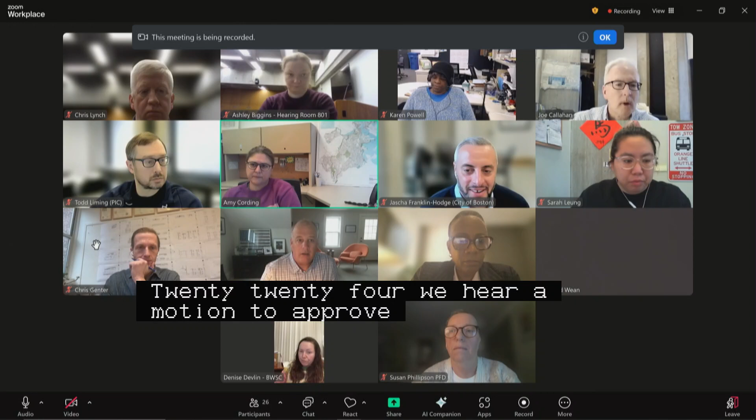Starting with new business number 1, 1520 Dorchester Avenue, Park Street, Dorchester. Specific repairs, vertical discontinuances on a set of petitions by the City of Boston Public Facilities Department. The proponents please introduce themselves, their affiliations, and give us a walkthrough of what you are proposing to do.

Good morning, Commissioners. My name is Susan Phillipson, and I'm the project manager with PFD, and I'll be managing the design and construction of the Fields Corner Library located at 1520 Dorchester Avenue, Dorchester, Mass. Please note at this time we are in process of finalizing the agreement, and I'd like to take this time to give you a quick project overview.

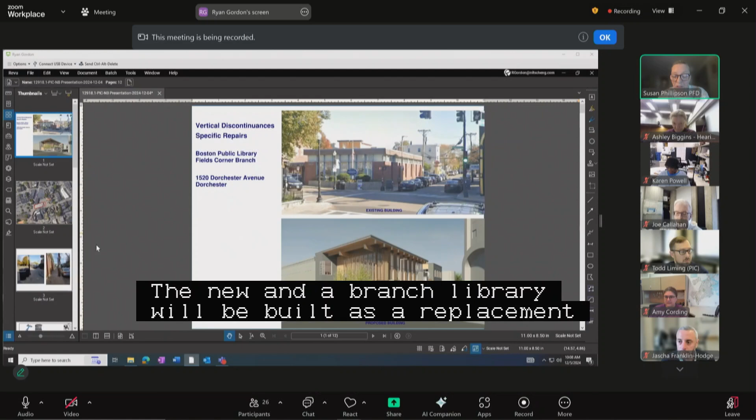The project will consist of replacing the existing single-story building, built in the 1960s era, currently 8,600 square feet, which will be demolished. The new Fields Corner Branch Library will be built as a replacement, programmed for approximately 14,700 gross square feet, and will be built as a two-story building.

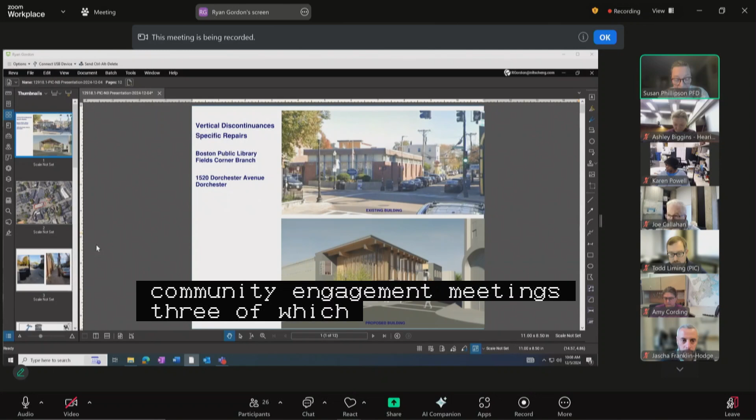The concept for the new library was conceived in collaboration with the Public Facilities Department, the Boston Public Library, and community input through a total of 6 public community engagement meetings, 3 held during the study phase and 3 during the design phase. At this time, I'd like to thank you for your time, and I'll now turn it over to Ryan Gordon of Nitsch to present the project's improvements.

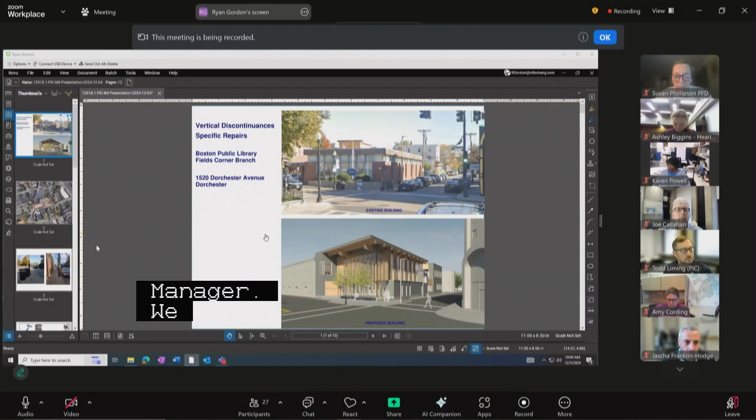Good morning. One second. Good morning to the commission. My name is Ryan Gordon, project manager with Nitsch Engineering. I was having some issues with my camera. I will present to you the vertical discontinuances and the specific repairs that we are seeking approval for.

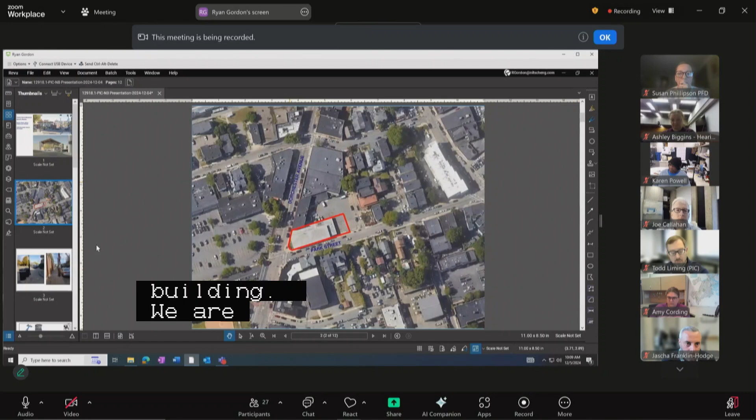Just to give you an overview, I have an image of the existing building here and a rendering of the proposed building. We are in the Dorchester neighborhood, Fields Corner. Dorchester Avenue runs north to south, and Park Street runs east to west. And here are some images of the existing public sidewalk.

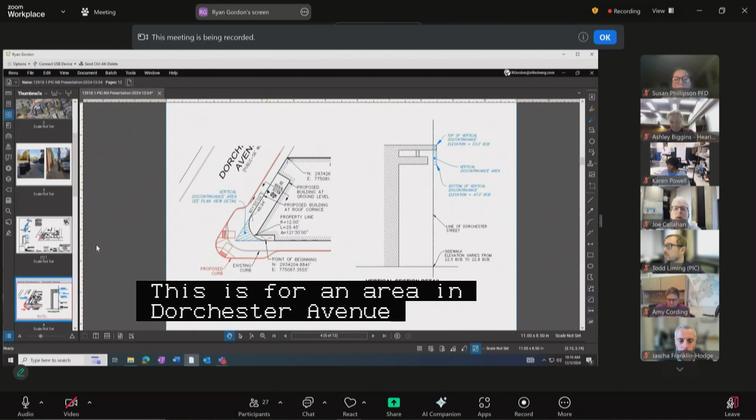First, I'll go into the vertical discontinuances, related to building overhangs and cornices. The first area is on Dorchester Avenue. I have side by side the area where we are seeking the vertical discontinuance, as well as a profile view. This is an area on Dorchester Avenue where the building will overhang for most of the street, extending just 2 inches over the property line. But as you round the corner, there are building elements that extend out over the property line, totaling an area of 116 square feet and a volume of 696 cubic feet.

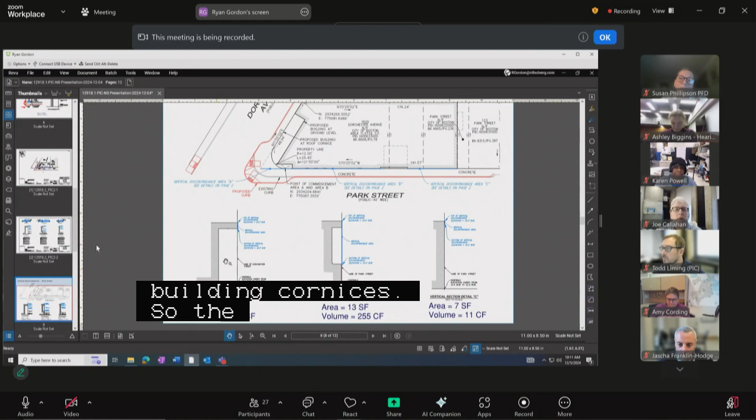Rounding to the other side of Park Street, there are 3 specific areas where we are seeking vertical discontinuance, each with plan view and section views, all related to building cornices. The first area is an extension of that overhang coming around from Dorchester Avenue, with a total area of 5 square feet and a volume of 20 cubic feet.

The second area continues along Park Street - 2 separate cornices at 2 different levels of the building for the 2 stories, with an area of 13 square feet and a volume of 255 cubic feet. A third separate area, area C, has an area of 7 square feet and a volume of 11 cubic feet.

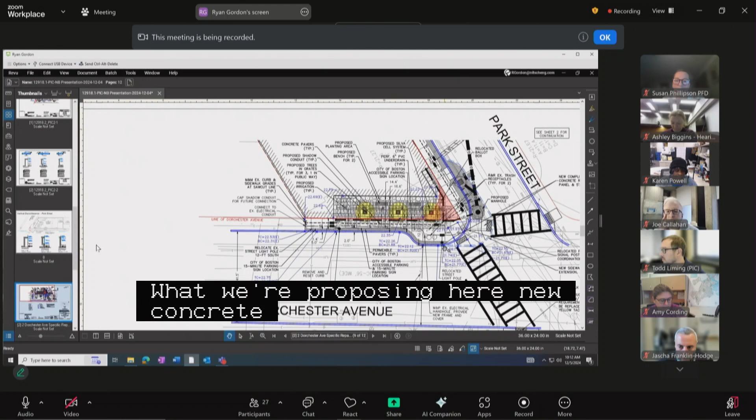Getting into the specific repairs, what we're proposing here: new concrete sidewalks with a permeable paver strip along the sidewalk on Dorchester Avenue. We are relocating a couple of existing City of Boston streetlights, providing new pole boxes and conduit.

We have 3 street trees. They'll actually be located under the building overhang, and only one of them extends into the public way, but we're including all of the information here as we have tree grates and silva cell systems under the sidewalk. We'll have irrigation and under-drains, and facilities is taking on responsibility for the maintenance of the trees.

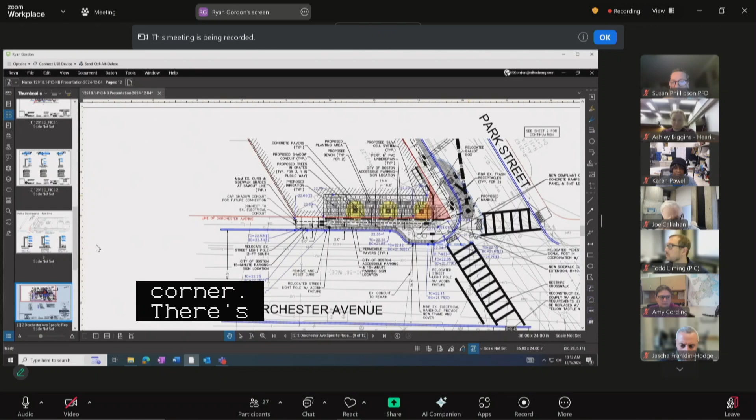We have a couple of parking signs that we're relocating, and we're also extending the bump-out at the corner. There's an existing bump-out there, and we're extending that out to narrow this intersection on Park Street and provide separate accessible pedestrian ramps. With that, we're replacing crosswalks.

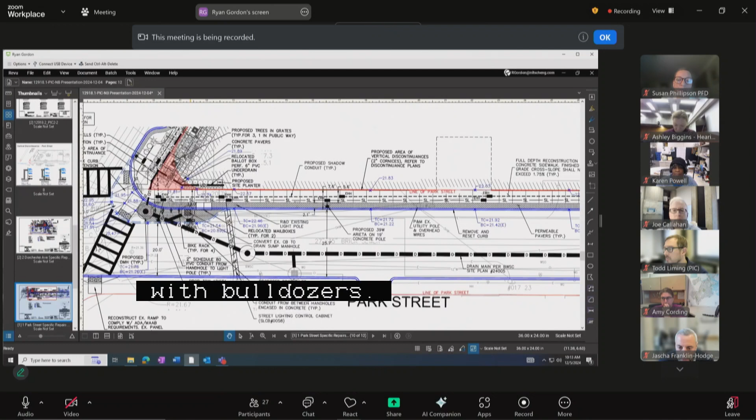We have new City of Boston streetlights with pole boxes. We'll have a parallel shadow conduit with pole boxes. We're removing and resetting the existing curb. We have a new catch basin drop inlet and a new drain main that has been approved by Boston Water and Sewer Commission.

And as we head down the street, we have an opening for the parking lot, and we worked with BTD and the Disabilities Commission to narrow the width of that opening for the driveway curb cut. And then we have a couple of sheets of our details. I didn't mention this, we have a couple of bike racks proposed in the new bump-out area.

So with that, I'll be happy to answer any questions that you have. Thank you very much. Commissioners, questions?

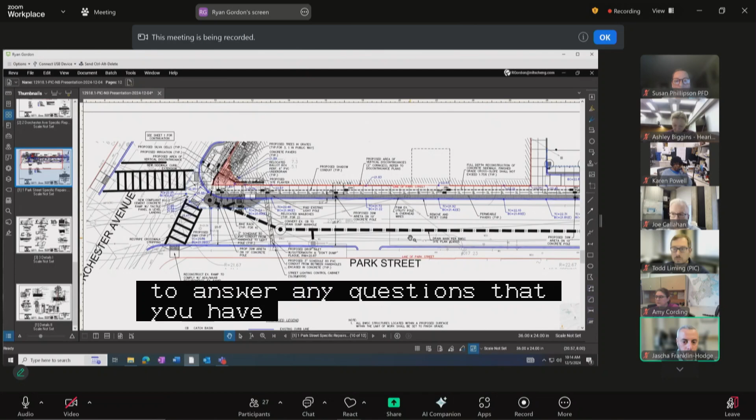All right, hearing none from other commissioners, I have 2 just quick questions. Apologies if you said this and I missed it, but what is the drainage situation related to the overhang? Is there a mechanism in place to ensure that it's not dripping water onto the sidewalk, or ice or whatnot?

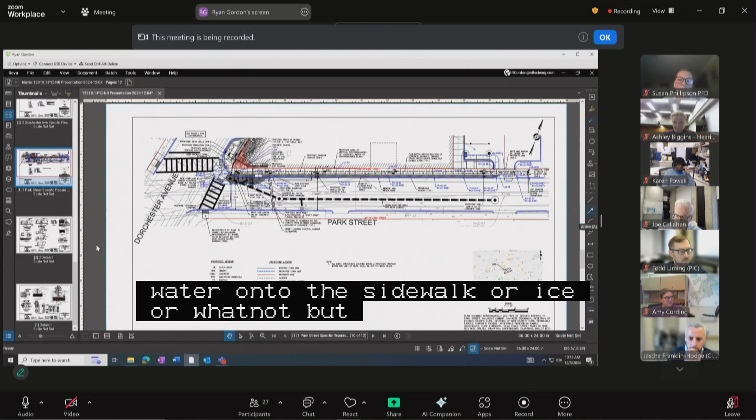The overhang — and Chris Genter from Edenzello, the architect, is also here, so please chime in if I'm missing anything, Chris — but it's essentially part of the building roof, so it'll drain. That's exactly right, Ryan. It's part of the building roof drainage system, so there's interior roof drains. It's sloping, draining away from the street. Nothing's dripping onto the street.

Got it, okay. And the second question was just, I was sort of intrigued to see trees being planted under the overhang. Can you say a little bit more about that? Interested in how you're doing that, how those are going to be maintained, all of that.

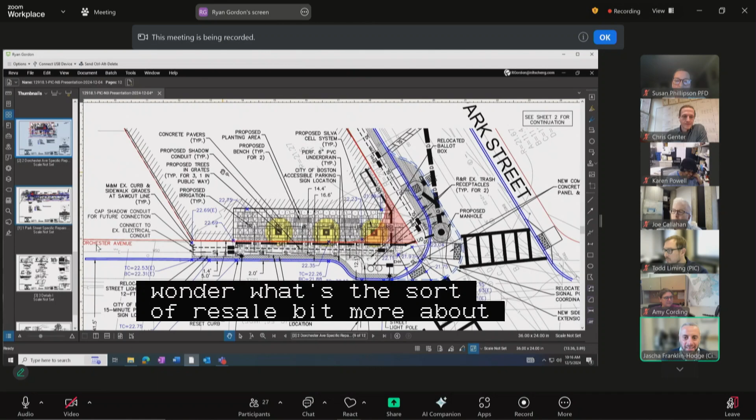Yeah, well, the overhang here is tall — let's see, we're, 47 feet, or sorry, 25 feet above the sidewalk here. So I know that the landscape architect has looked at this for the tree species that'll be successful here, and they're willing to take on any maintenance, should there be any issues with this under the overhang here.

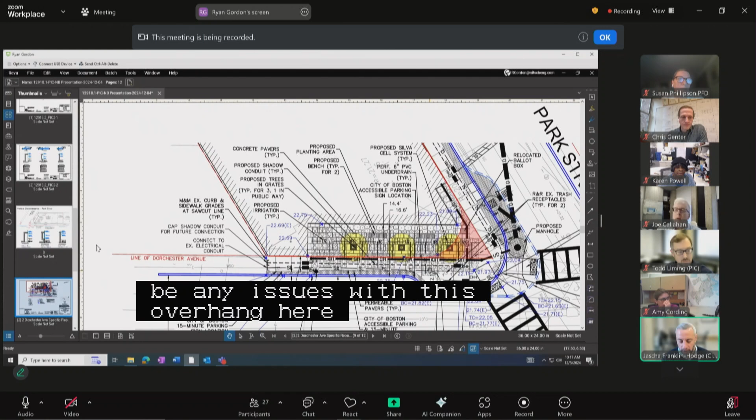And will the trees themselves be covered under the LMI, or are those anticipated to be maintained by Boston Parks as most other street trees are? The trees will be part of the LMI. Okay, got it, okay, excellent.

I have no other questions. PIC staff or members of the public? I will take this opportunity to remind everyone, if you wish to add testimony or ask questions, please use the raised hand function at the bottom of your screen. I don't see anybody lined up right now. I don't have any comments either, so I think we're all set on this for now.

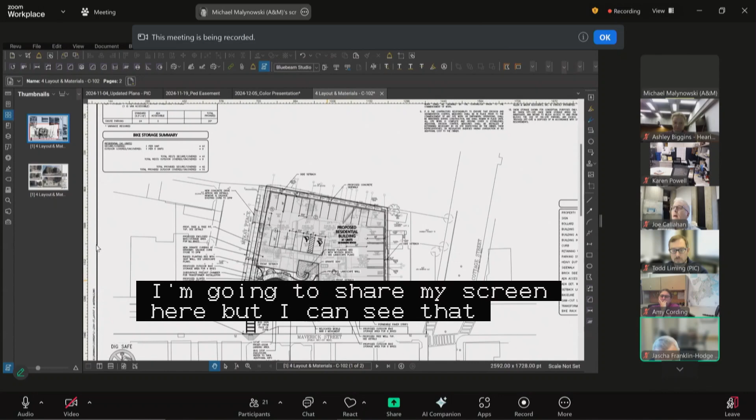Everybody can see that? Yep, we can see. All right, so our project is located on the corner of McKay Place and Maverick Street, just in front of the McKay School, which is right here. The existing project consists of 4 residential lots, consisting of several multi-family buildings. All of the buildings will be razed, and a new building will be constructed in its place, consisting of 41 units with 26 parking spaces.

As you can see, we've got garage parking on the first floor, which will access McKay, an amenity space, and then the upper levels will be residential dwellings.

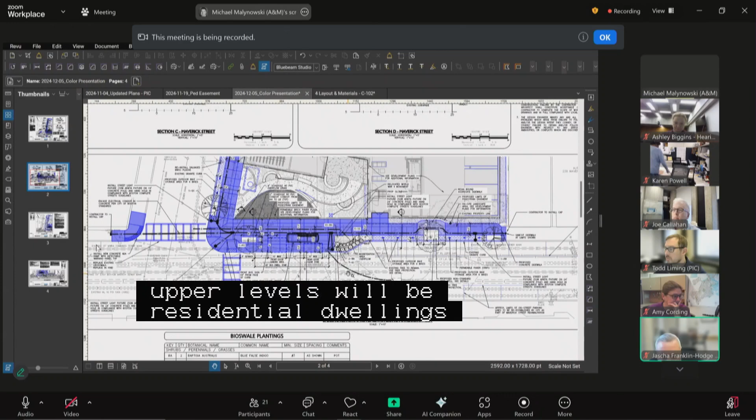Let's get into the public improvements. The proposed improvements for the project include some off-site features. We have a pocket park that we've gone through permitting with the BPDA, though that is not included in our LMI. That work will consist of new sidewalks along McKay Place and Maverick Street.

This includes new crosswalks and corresponding ADA ramps along Maverick here and here. We also have a bump out being proposed to accommodate a new bus shelter in this location. Our sidewalks will be a minimum of 6.5 feet, along with a permeable paver strip that is 3 feet, giving us a total of 9.5 feet as a minimum condition in the space.

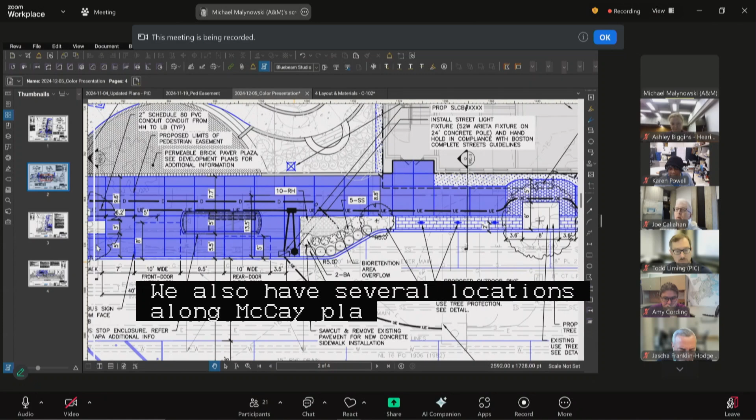We also have outdoor bike parking located here along Maverick Street, and several locations along McKay Place as well. As part of the discussions with Boston Street Lighting, we have light poles and conduits with pull boxes being installed along Maverick and on McKay.

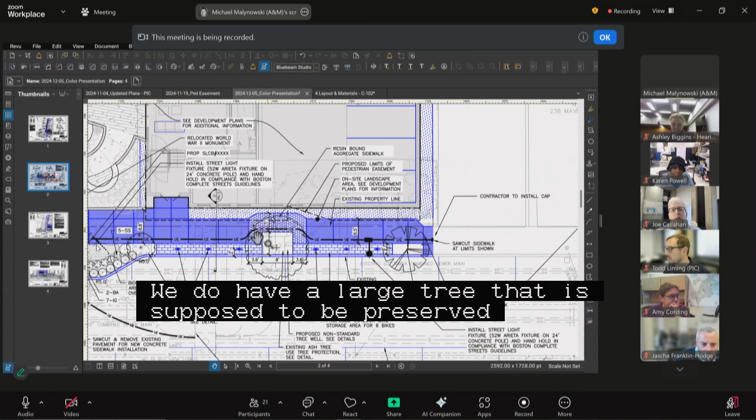There's an existing tree being preserved here, and the creation of a small bioretention rain garden area in this location. That area will have under drains and drain to existing infrastructure in McKay Place. We also have a large tree proposed to be preserved based on discussions with city staff. The sidewalk on the back side has been pushed out to accommodate severe heaving in that area, and that sidewalk will be constructed out of resin-bound aggregate to hopefully maintain a walkable surface should those root structures heave much more.

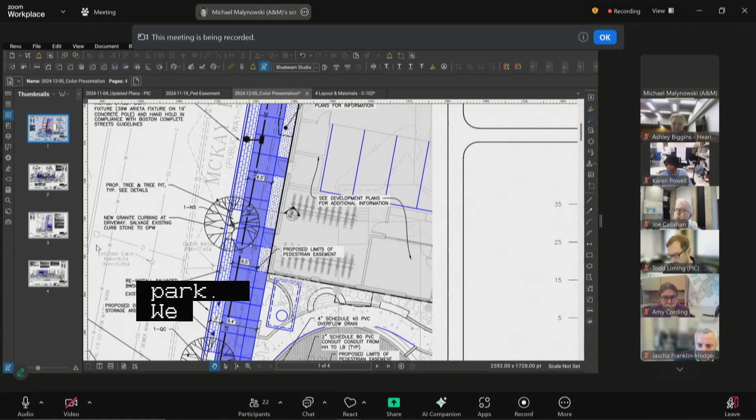We also have work being completed along McKay Place. There's a large sidewalk included in the pedestrian easement that provides access to the pocket park, plus several locations with bike parking entering out on the public street. All sidewalks are 6.5 feet, as you can see here, along with a permeable paver strip in between. We have new street trees proposed along McKay, and a new one proposed along Maverick, with the two existing trees maintained as well.

As part of our project, a pedestrian easement plan has been prepared to facilitate this, allowing for the widened sidewalks to be installed along Maverick and McKay Place. Happy to answer any questions the board may have.

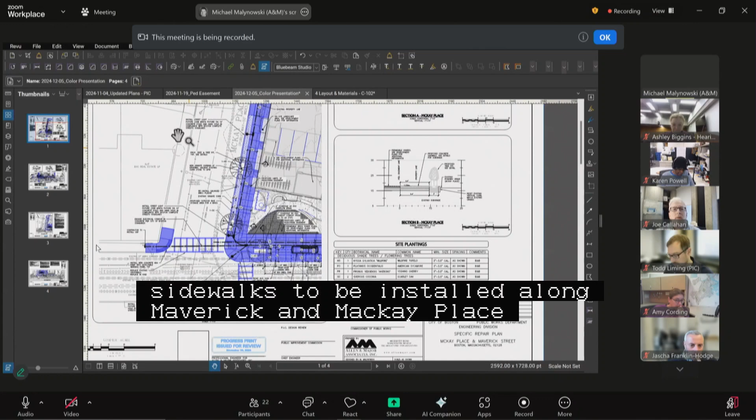Commissioners, any questions or comments? Just to confirm something — the intent of the curb extension here into Maverick is that it will eat into what is currently the parking lane, is that correct? Yes, we take approximately two parking spaces that are in that area.

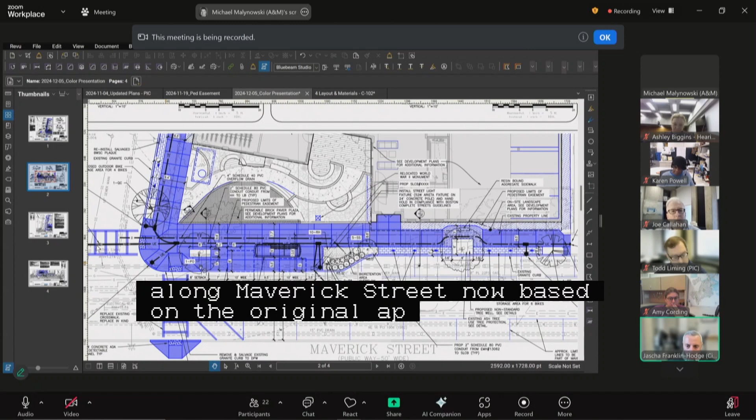So it's one-way traffic along Maverick Street now. Based on the original approvals from the BPDA, that was an item requested to have that bump out and a more enhanced bus drop-off. So we've had discussions with BTD that were facilitated through the BPDA as part of the process, and we did receive their input. So we have the front door landing areas, rear door clear areas, and making sure we have enough stop distance before we get to our proposed crosswalk.

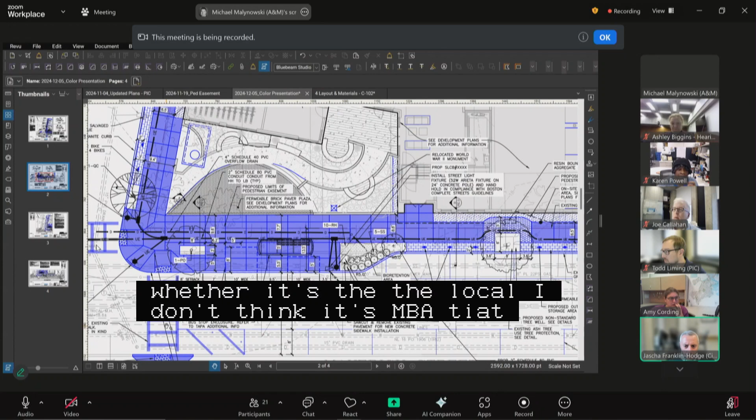Got it. And is this an MBTA bus stop? I'm not sure whether it's MBTA or the local one. I don't think it's an MBTA stop. Okay, so is there any clarity on who's going to use this? Is there a shelter being installed, or is this just— Yes, there is. I mean, there's a bus stop there now, and it's just being enhanced with a new shelter. Okay, but we're not sure who's using that bus stop or what service that is.

Correct, but we can definitely find that out. Yeah, it would be helpful just to know the purpose of that — in terms of who it's serving or what services are being operated out of there.

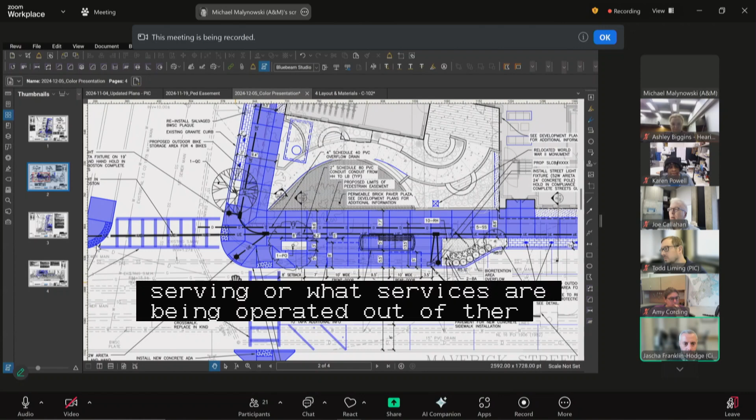But you're saying there is now a bus stop there. I'm looking at Google Street View right now, and as of September 2022, it doesn't appear there was a bus stop at that location. So it sounds like something may have been added subsequently, but I'd like to understand the dynamics of that. We can definitely look into that for you.

It's up a block at Frankfort, so if that's the stop that's moving, there's a 120 stop at Frankfort, a block up, which is right after McKay. Right, that's an MBTA stop. Correct, yeah, so there's one at Cottage and one at Frankfort, but right now we're putting a shelter in between two known bus stops, for a stop.

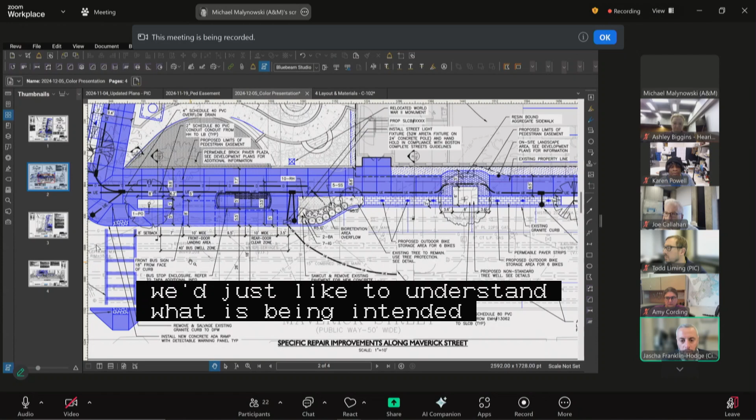That is unclear. This may be a consolidation of those two bus stops at this location, and we'd just like to understand what is being intended for that, and then to the extent that it is a consolidation, I want to make sure the MBTA is fully on board, and have the opportunity to talk through whether any community outreach or notification is appropriate here. We've had, in other contexts, even relatively minor bus stop relocations or consolidations of this sort sometimes generate a little bit of concern within the community.

So, not to necessarily put this all on the project, but just want to make sure that all of the parties who are responsible for that, the T in particular, is fully aware and is doing whatever outreach they need to do. So I think the first step is just understanding what we're building and for what purpose, and then we can figure out who needs to do what in terms of informing folks about a potential change.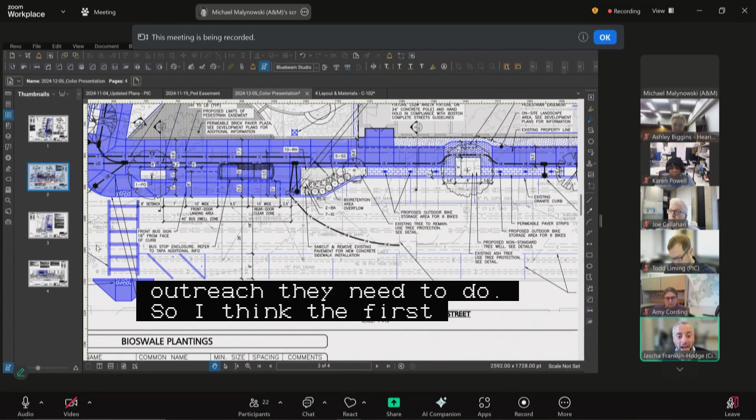Yeah, we can definitely do that and find the history of that. I know the proponent has had several meetings with the Gove Street Citizens group, which is in the area, as well as several abutter meetings and meetings with the school as well. So we will definitely get some clarity on what's happening with that stop.

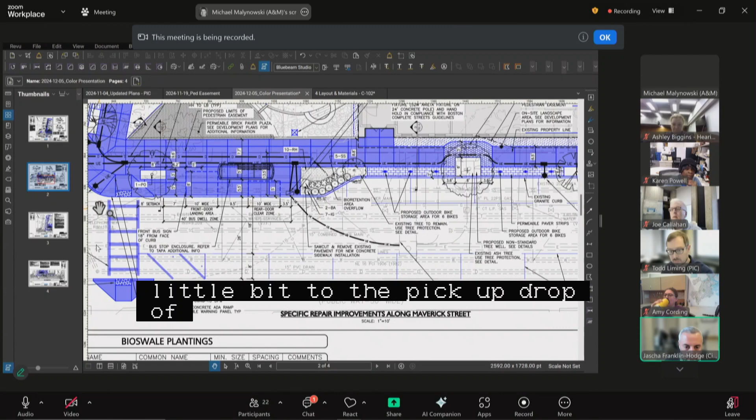Appreciate that. Okay, and then I guess kind of semi-related to that is, can you just speak a little bit to the pickup drop-off plans and expectations for this building, where activities like loading are anticipated to happen, all of that?

So loading would most likely happen on McKay Place, outside of this area, because we've got an area where they can drop in there. We do have some parking spaces in front. There is a mailroom located in this space here. So they do have some areas along the front. There are some existing spaces, which I'm not sure whether they've been restriped since the work on Maverick's been completed, but there is space along the front.

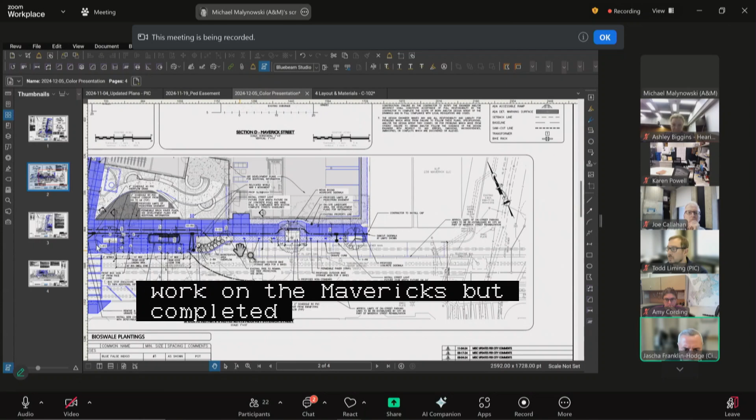Okay, so is there a designated loading zone? We don't have a regulated loading, we don't have a designated loading zone. Got it, okay, so it's resident parking in the curb regulations along there.

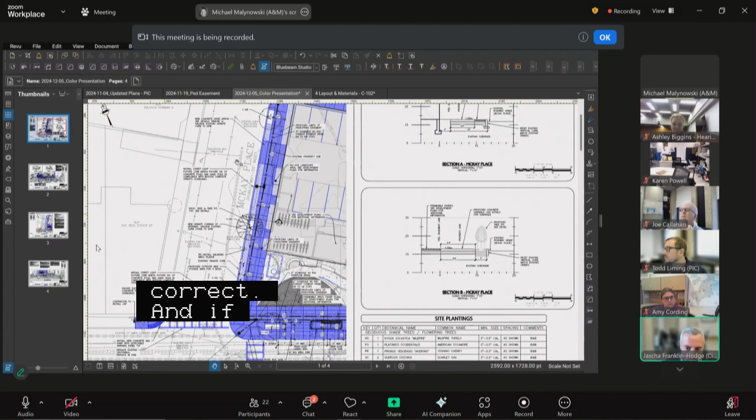Okay, so the expectation would then be, if there's any loading activity happening along this stretch of Maverick, that it would be either opportunistically using available curb space or occupying the travel/bike lane, as would probably be done today. Correct. And if there's move-ins and stuff, they could be shifted to McKay.

Okay, because it's primarily one driveway for an abutting property here, and then it's the school, so during off-peak, if there was drop-off of deliveries, there'd be very little traffic coming down McKay if the school's not in session.

Okay, are you expected under your board approval to negotiate a TAPA for this project? Transportation access plan agreement? I believe we are, and I believe that VHB, who is the project traffic engineer, is in the process of preparing that. I don't know whether that has been fully submitted yet.

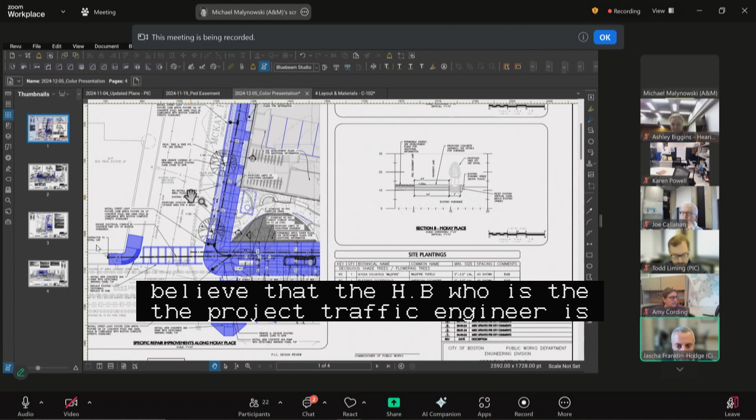Okay, I think that is ultimately the appropriate place for these kinds of questions to get sorted through. A train of thought here was we're changing the curb, the physical structure of the curb area in front of the building. We're extending it out and narrowing Maverick Street in a way that would make it more difficult for there to be opportunistic loading right in front of the building at the corner with McKay.

So, given that we're making it incrementally harder for activities like that to take place right in front of the building, I want to make sure there's some thoughtful planning that goes into how those will take place to minimize disruption. In particular, I don't want to see the new crosswalk over Maverick that we're building be visually obscured or blocked by loading activities. But I think that detailed discussion can be pushed to the TAPA process, as long as there is a TAPA happening here.

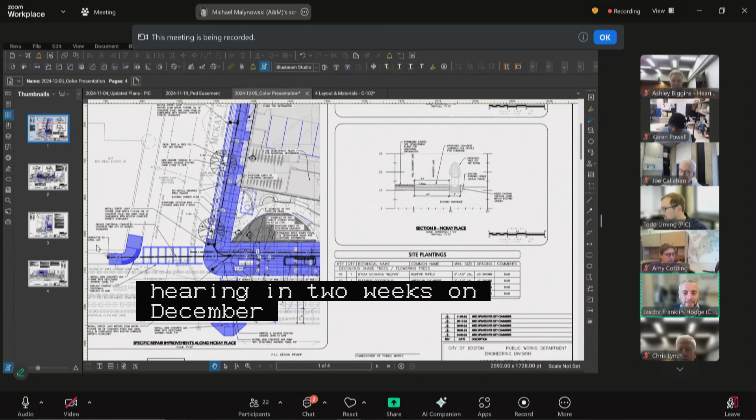All right, on to new business number 3, Hillsboro Street, Dorchester, abandonment on a joint petition by HSS Partners LLC, Diamond 89 LLC, and 9 to 11 Hillsboro Street Condominium Trust. The proponents please introduce themselves, their affiliations, and walk us through your proposed action.

Good morning, Mr. Chairman and members of the Commission. I'm Brian Goldson with New Atlantic Development, and with me today is John Schmid, Vice President of Nitsch Engineering. We're here today to petition for the abandonment of an unimproved area at the end of Hillsboro Street in Dorchester. This petition is associated with the proposed redevelopment of number 2 Hillsboro Street, a 21-unit affordable home ownership project that includes 18 units designed as live-work studios for artists.

This project has already received funding from the Mayor's Office of Housing and the required approvals from the BPDA and the ZBA. This project is an offshoot of the Humphrey Street Studios, an arts complex with 45 individual artist studios that was purchased with support from the city at the end of 2022 and turned over to a nonprofit controlled by the artists, with the sole purpose of preserving the studios and keeping them affordable in perpetuity. New Atlantic worked with the city and the artists to secure this property and form the nonprofit. The new homeownership project is being developed on a vacant lot behind the Humphrey Street Studios building.

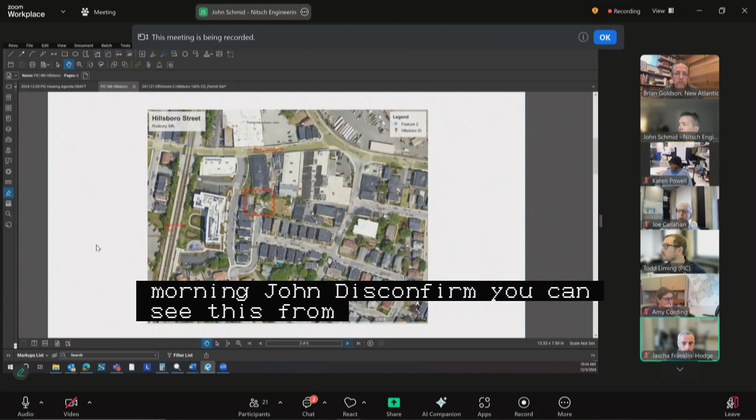With that, I'll turn it over to John Schmid to walk you through the proposed abandonment. Good morning, John Schmid, Nitsch Engineering. Please confirm you can see the screen. We can. Okay, so this is the area. This is Hillsboro, which is a private way that dead ends right here. It's south of East Cottage Street and east of the commuter rail.

This is the proposed building that Brian alluded to. It's going to be 4 stories consisting of 21 units proposed. This is the parcel in question. The area highlighted in yellow is the discontinued area, and the area highlighted in red is the parcel. The discontinued area, go back - the discontinued area consists of approximately 3,000 square feet. It's about 76 feet in length, about 40 feet in width. And then the parcel itself is about 10,000 square feet.

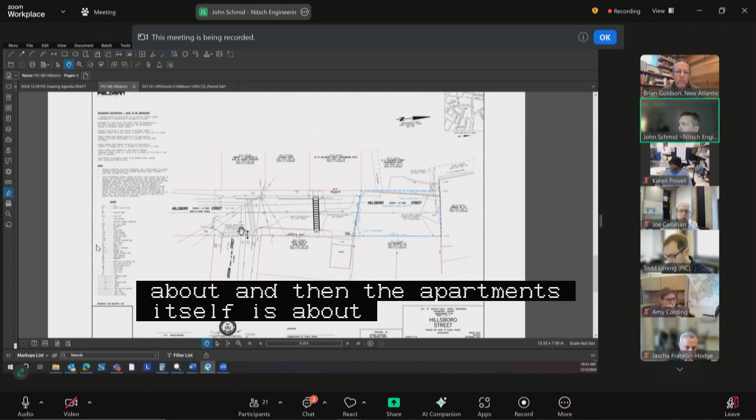This is the plan that's before you. Essentially, Hillsboro is improved up to this point here where it serves as a driveway to a development that was constructed several years ago. We are proposing a mid-block crosswalk at the end of the layout. This has been coordinated with Public Works and the Disabilities Commission to ensure that pedestrians have a path of travel without being abandoned at this point here.

The walk of the area, again, there is a sewer line, BWSC sewer line, that comes through the site. We have a BWSC sewer easement, and have met with John Sullivan and the board on this project. We also have the Eversource light pole here that will be maintained, and we're in the process of working with Eversource to ensure their rights are continued as the abandonment proceeds. Any questions?

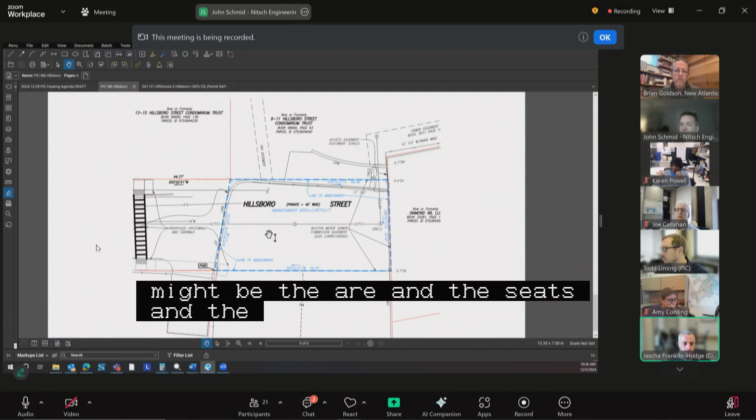Commissioners, questions? PIC staff or members of the public?

For this one, I'll just mention that we have been working with the project on finalizing their title opinion, and they're prepared to submit that to us by the end of next week. So we expect to have that ahead of the public hearing.

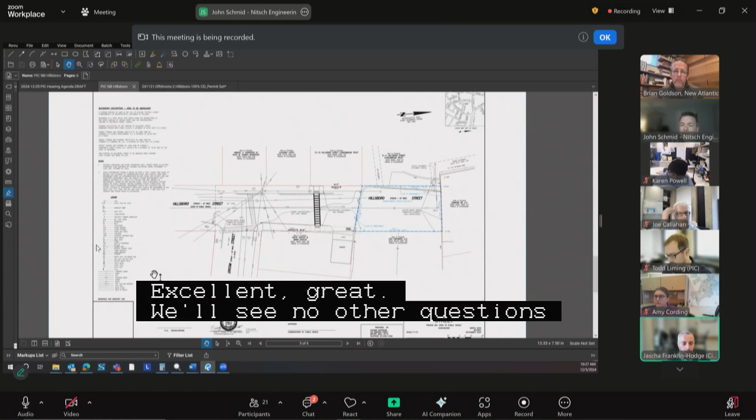All right, on to our last agenda item, new business number 4, 361 Belgrade Avenue, Anawan Avenue, Belgrade Terrace, West Roxbury, abandonment, pedestrian easement, specific repairs on a set of joint petitions by Upton Belgrade Investment Partners LLC and Clay Consolidated LLC. Would the petitioners please introduce themselves, their affiliations, and walk us through your proposed actions?

Yes, my name is Jake Upton. I'm a partner with Upton Belgrade Investment Partners. We are the developer of 361 Belgrade, which is located on Belgrade Avenue at the corner of West Roxbury Parkway.

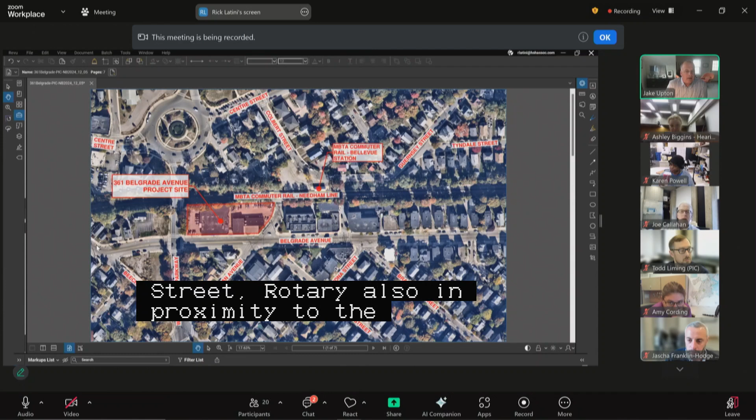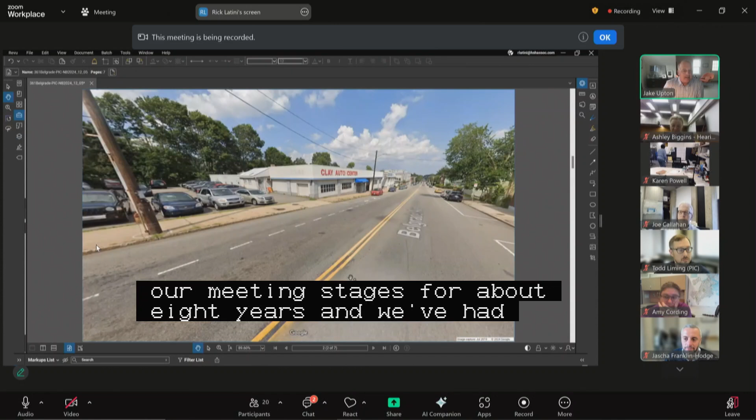Close proximity to Centre Street Rotary, also in proximity to the MBTA Bellevue Station commuter line. There are 3 bus lines that have bus stops within 2 blocks of the area. It is a former Clay Chevrolet car dealership and auto repair facility that we have been in permitting stages for about 8 years, and we've had a lot of participation with the PIC staff in the infrastructure discussions. We're moving forward with development.

We have now received permits for 124 units of residential housing with 1 unit of commercial space. It is a 4- and 5-story building built into a sloped hill that has about a 14-foot gradient change from the top of the site near West Roxbury Parkway down to Anawan Avenue, which is on the other side along Bellevue.

The commuter rail, MBTA commuter rail, is directly behind the project, and we've been working with the City of Boston to revise our development plans to take a current surface parking lot and put it underground, and then create green space to create a visual reconnection of the shoulder of the West Roxbury Parkway.

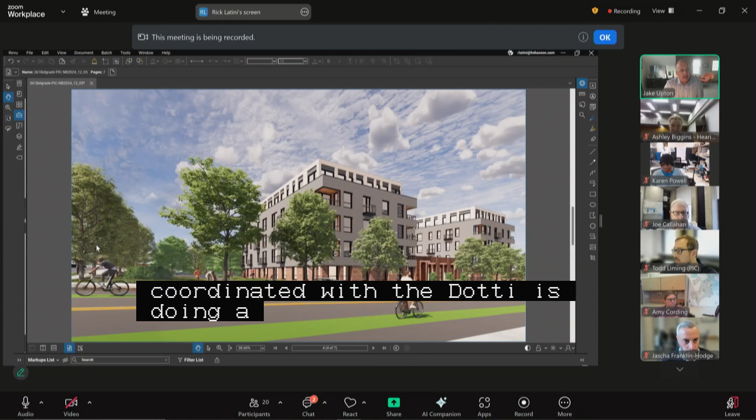Our plans have been done and coordinated with the DOT, which is doing a new intersection, adding bike lanes, and a new bridge reconstruction in close proximity to our project. So we have coordinated our design with them in a very detailed way over a number of years.

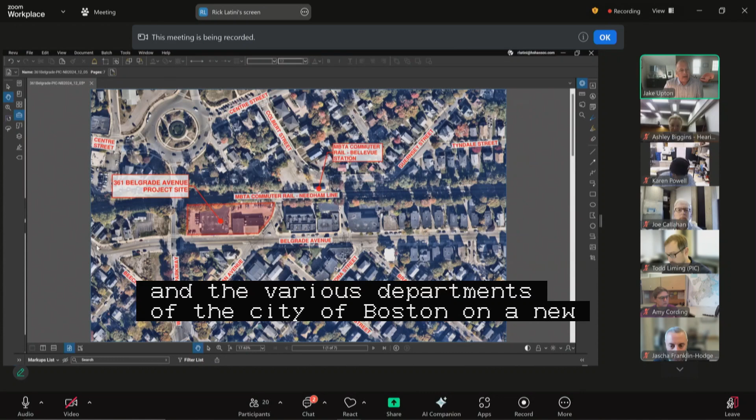And we've also worked with the MBTA and the various departments of the City of Boston on improving the pedestrian way around our property and facilitating pedestrian and vehicular commuting to the MBTA commuter rail station, which has a surface crossing at the end of Anawan Avenue. We've added some crosswalks across Belgrade with a safety island that we're going to go through the detailing of with you.

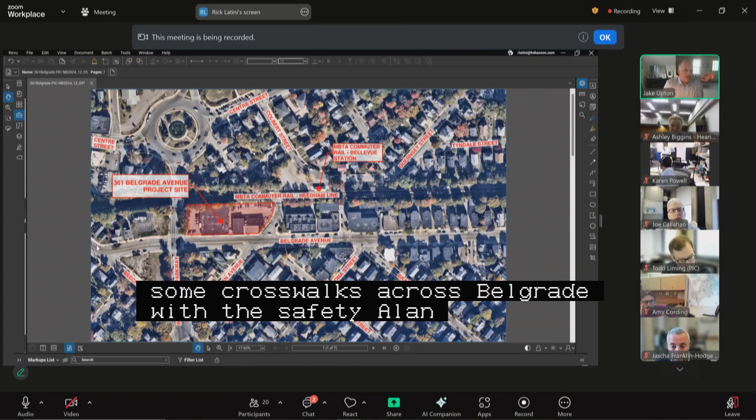So that's the general overview of the project. We've recently been updating with a lot of comments from different departments, and Rick Latini of Howard Stein Hudson is going to take it from here. I'm here if any questions. Thank you for joining with us.

Thank you, Jake. I'm Rick Latini with Howard Stein Hudson. So I'm just going to run through the 3 petitions in front of you real quickly.

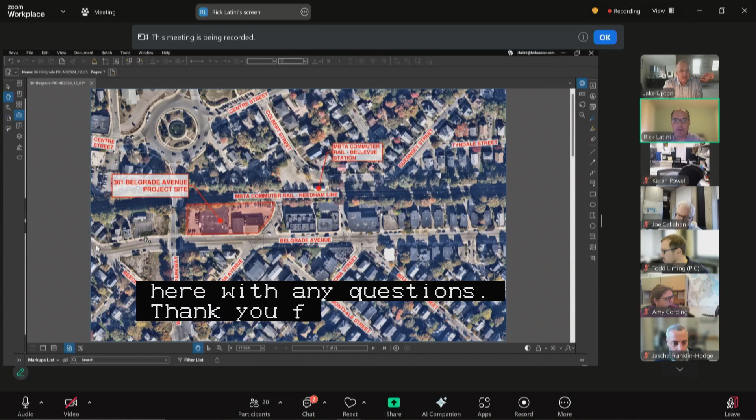As Jake mentioned, we're proposing a 5-story building with about 124 residential units. There'll be parking, off of Belgrade Avenue, off of Anawan Avenue, which is off of this locus here. So the first petition in front of you is to remove a private way and for its abandonment.

This private way is only about 15 feet wide. It only appears to service these lots. They've been consolidated—these used to be 2 separate lots, so it doesn't seem to serve any purpose. There are some small utilities in there that service these buildings, which are actually being demolished and cut and capped at the main as part of this project.

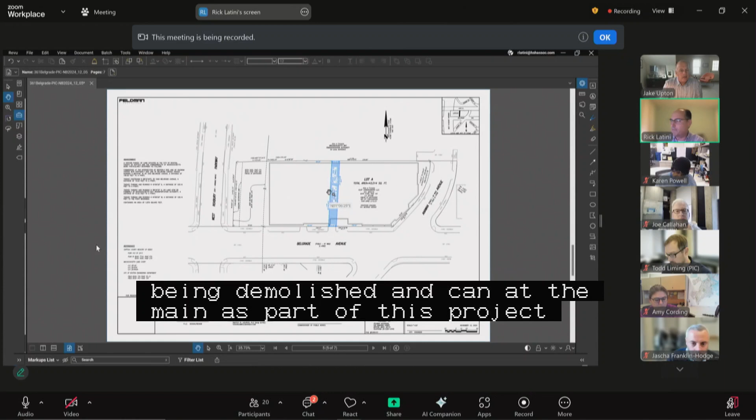As Jake mentioned, there's actually a drop off here to the MBTA, so this isn't access to the MBTA or anything like that. I think it was for these lots, which have since been consolidated, but we're trying to officially abandon this 15-foot private way that seems to serve no purpose.

The second item is a pedestrian easement on Anawan Avenue. We're adding about a little under 3 feet of pedestrian easement, allowing us to add a 6-foot sidewalk while adding a furnishing zone, which doesn't exist today, better shown on the specific repair plan. You can see here the easement, giving us the 6-foot wide pedestrian path and the ability to add a furnishing zone.

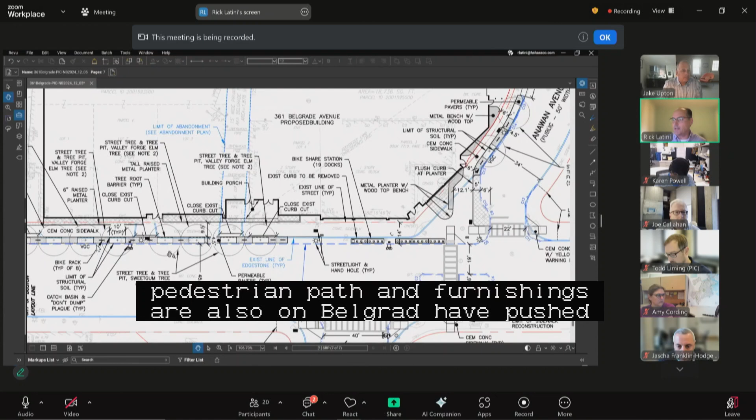We're also, on Belgrade Ave, pushing the curb out about 4.5 feet. This gives us a cement concrete sidewalk ranging from about 7 feet to about 9.5 feet wide and provides this furnishing zone. In this furnishing zone we'll have street trees, bike racks, new pendant lighting, and also a bike share station.

Lastly, on the specific repairs, we were working with the planning department and Boston Transportation Department on narrowing the pedestrian crossings on the Anawan and Belgrade intersection. On the north side of the leg, the crosswalk between the pedestrian ramps is about 66 feet, and we're narrowing that down to 22 feet with these sidewalk extensions. On the south side, the distance between the 2 ramps is over 70 feet, and we're minimizing that down to 40 feet.

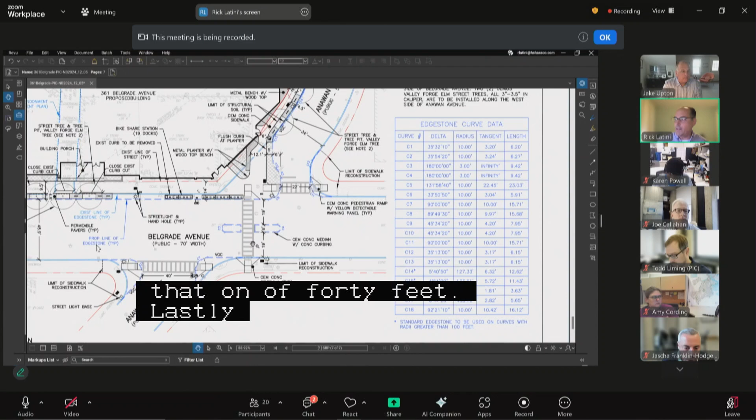Lastly, Belgrade Ave, once again, the overall width is being decreased by the 4.5 feet I talked about earlier for the furnishing zone, and they asked us to add a pedestrian refuge in the middle here too. I think that's all I had for that.

I would take questions. I think I saw Brian Bizel on here too from my company, who's with our transportation group. So if there's any questions, happy to answer them.

I would just like to point out that the MBTA crossing is at the end of Anawan Avenue on the right-hand side. It is not off of the east, the private way that we're dissolving. There's actually quite a grade change, about a 12-foot grade change from the edge of our property line down to the track level. So it is not feasible for any kind of access to the MBTA station, and that's been thoroughly reviewed.

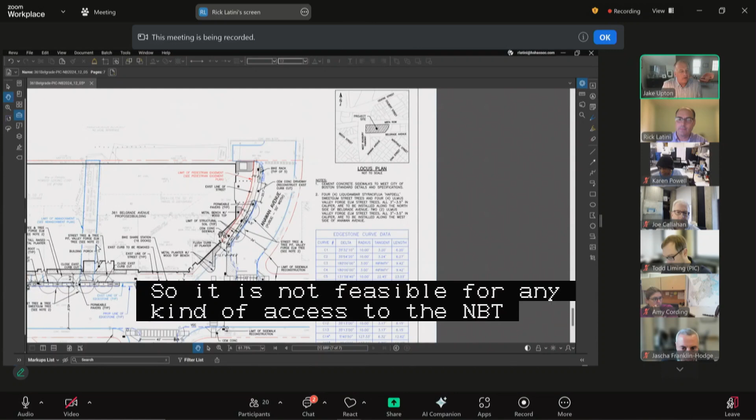Commissioners, questions, comments? I was wondering in the pedestrian refuge if you could add detectable warnings on either side, just to indicate that for blind and other folks. Yeah, actually, we typically do that, I missed out on this one. This is the last, as you know, this intersection had something different about a month ago, and it got changed at the last second by BTD. So yeah, we'll add that. Thank you for noticing that. Just want to make sure that they're properly tracked, so I appreciate it.

Also, this is subject to a TAPA agreement, so all the pavement marking and stuff will be through BTD, and I can copy you with that, Sarah, if you want it.

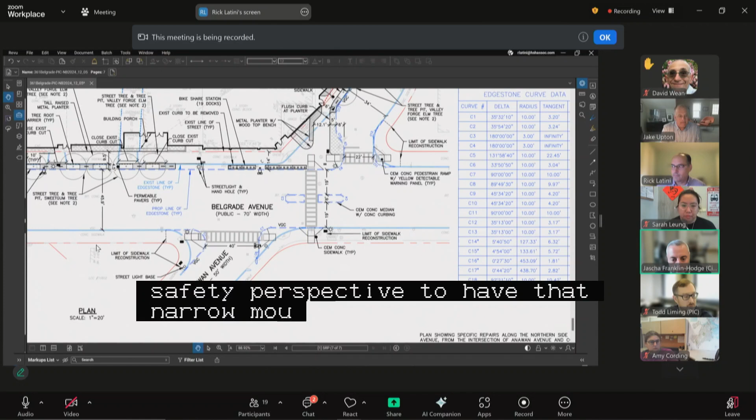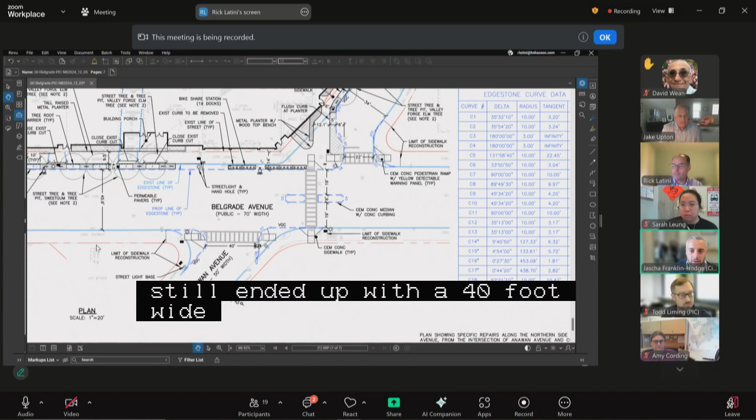David, the raised hand will get you in the start of the public comment section. Just if you could, for me, speak a little bit to the crosswalk condition on Anawan south of Belgrade. This is obviously much improved from a pedestrian safety perspective to have that narrowed mouth and that kind of teed off corner. For context of my question, this little stub of Anawan between West Roxbury Parkway and Belgrade is a heavily used cut-through to avoid the intersection of Belgrade and West Roxbury Parkway and the signal there. I've heard many concerns from people who live along this stretch, or who cross along this stretch, about the pedestrian experience, given that the intersection is skewed and allows for high-speed turns off of Anawan onto Belgrade. It's a kind of harrowing little bit of roadway for anyone on foot. Obviously this is going to improve the situation, but I'm interested in why we still ended up with a 40-foot wide mouth here as opposed to a raised crosswalk situation or something that could further calm traffic. So I'm hoping the project team could talk through the iterations on this and identify any obstacles you encountered to a more aggressive approach to enhancing pedestrian safety on this crosswalk.

Yeah, on this one we couldn't do the raised crosswalk for a couple of reasons. There's some utility conflicts, we couldn't get the grading to work, and we also couldn't get it to work without closing this driveway down here. So that's why the raised crosswalk wasn't pursued. I can see if we can tighten this up some more. We've been talking with William Moose and John Monticelli from BTD, so we can ask if they have other ideas we could entertain. We just didn't want to go too far down Anawan Street chasing stuff, but I know the raised crosswalk didn't work.

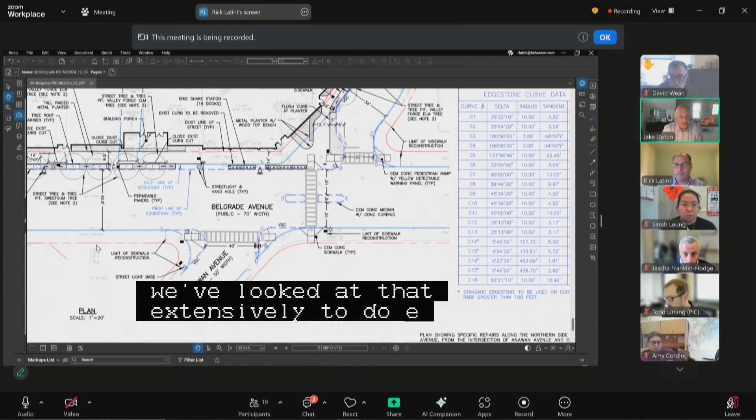I would like to add that we've looked at that extensively to do everything we can, and we've heard the need to slow vehicle traffic. We've vetted this in a very detailed way, and this is what makes the engineering work for all the other components of the streetway with the utilities and everything else. We also added streetlights on both ends of these sidewalks, which was not originally part of our scope. Unfortunately, we would have liked to have done it, it would have been a lot easier for us to just do the raised crosswalks, but the engineering doesn't allow it. What we have here has now been vetted with multiple agencies. We've been trying to push the envelope as much as we can, we've been hearing that feedback for a number of years, so we're doing what we can here, and it's really very difficult to come up with anything more in that regard.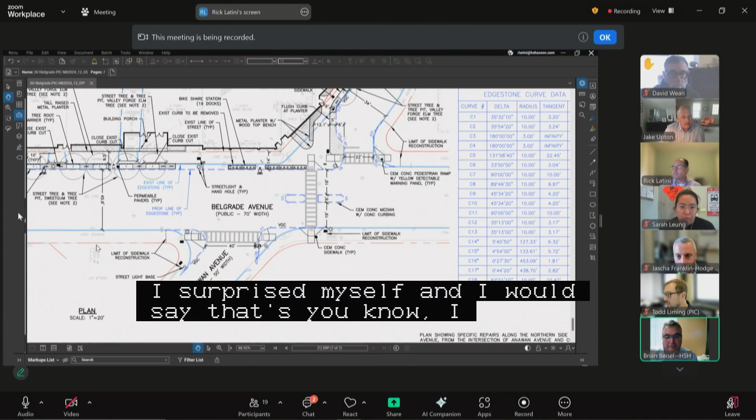That's Brian Beisel from Howard Stein Hudson. I think making that radius on the east side much smaller than the existing one will certainly slow people down. There's no pavement markings on here yet, we'll add a stop bar obviously. So I think this is a big improvement for pedestrians. Just making the smaller radius, plus making it perpendicular to Belgrade, will make drivers have to come through more in line, instead of rolling through it the way they are now and making that soft right turn.

So it should be a huge improvement for pedestrians. We've made it—we bumped it out into Belgrade, but that didn't work for different reasons, and that got changed, like Rick said, within the last month. There's that driveway, and on the west side, the more we make that radius narrow, you start getting to points where the ramp doesn't have enough landing area, so we can't keep pulling that over more. So this is, I think, a great improvement.

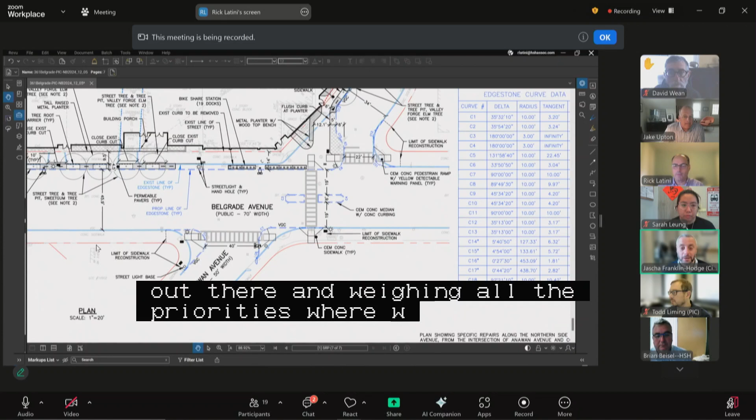I don't want to say it's the best we can do and make it seem negative. I think it's a great improvement compared to what's out there, and weighing all the priorities, this is where we fell. I appreciate that additional detail, and agree with you, Brian. This is substantially better than where we were and where we are today. Appreciate all the work that's gone into it, and a lot of back and forth. My purpose in asking the question was to have you illuminate on the record some of that work and thinking, and I appreciate you doing that, and I'm excited to see the significant pedestrian safety benefits that will come from this project.

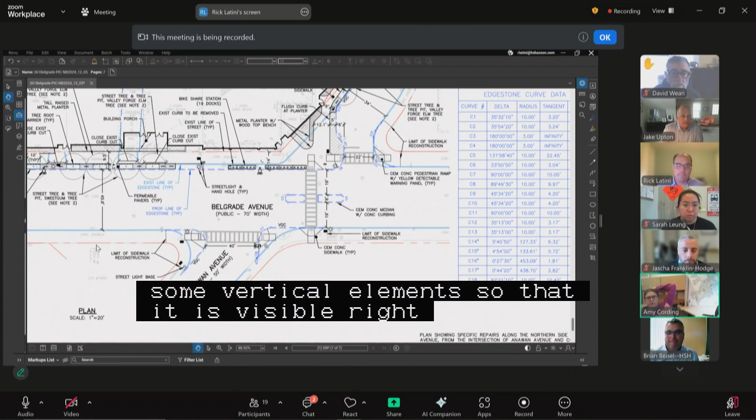So appreciate that, all the back and forth that went into it. When we get to pavement markings, we should consider taking up some of that space with markings as we go around the new median island. The median island should have some vertical elements so it is visible—signage, something out there. But I think that some of the dimensions we couldn't do with curb, we can probably do with paint, which will help visually tighten this up as we get up here.

Yeah, so what Amy's referring to is the median at 6 feet wide. We had a request to make it 8, but we ran auto turn, and because we're making all these radii so tight—which is great for pedestrians—it makes the truck maneuvers need a little extra space. You can see there's 19 feet, which we wouldn't normally need, but we do need it for the maneuvers to work. So we can narrow that 19 with pavement markings so that garbage trucks and move-in/move-out trucks can still come and go, but visually it'll be much tighter than the dimensions shown here.

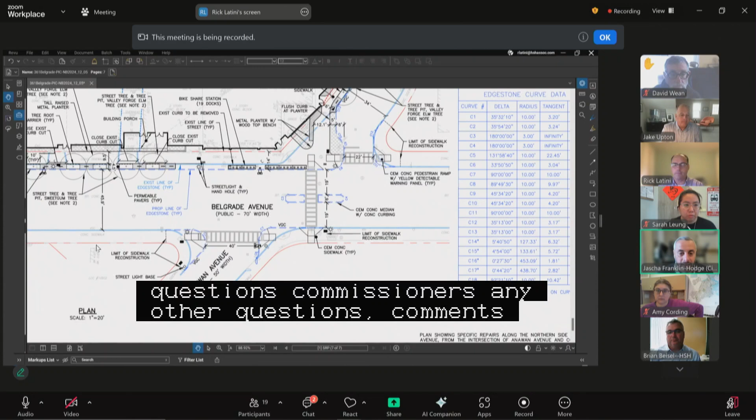Excellent, appreciate you continuing to work on that on the traffic side of things. Those are all my questions. Commissioners, any other questions or comments? All right, seeing none—PIC staff or members of the public. I see David Wean has his hand up. Go right ahead, David.

Specific to the Anawan crossing, I'll echo that it looks like a huge improvement. We talked about people leaving Anawan Avenue turning right onto Belgrade, but there's also the left turn from Belgrade onto Anawan. The narrowing of the intersection, slowing people down and making it more of a 90-degree turn, plus the median—if it's properly visible, marked, and respected, not ridden over—also makes the left turn from Belgrade onto Anawan, since Anawan is a two-way street, require you to be more intentional while driving. So I think that's also a plus.

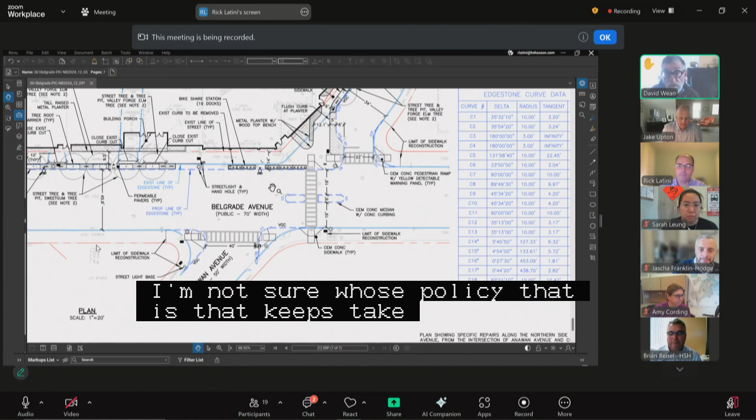The question I raised my hand about was the bike share station. I'm not good at reading these diagrams, but is that station on the street or off the street? Currently there's a bike share station around the corner there, and it's only seasonal because it's on the street. I'm not sure whose policy it is that removes all the on-street stations every year in November or December, but I'd love to see that changed. But this one—will it be permanent or seasonal like the current one?

Yeah, so the dashed blue lines you're seeing are where the granite curbs will be. To go back to your first point, the median isn't just going to be painted—it's going to be vertical granite curbs, so people won't be turning over it. And like we were just saying, we'll make it look even bigger with pavement markings around that. For the blue bikes, we're moving the blue bike station onto the sidewalk so it will be year-round. Also, which is great and a new option for blue bikes, there's going to be a gap in the station for the catch basin there, which the new stations can accommodate without needing a conduit connecting the two, like we have to have in some places now.

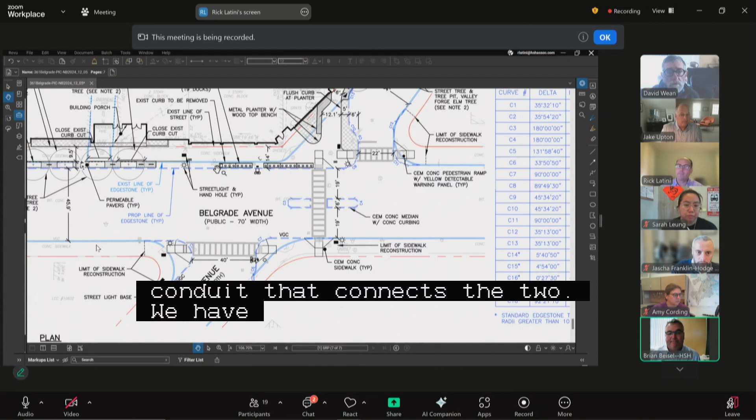Got it, great. The bikes will basically be backed up, entering the station from the sidewalk, and the sidewalk there is 14 feet including the station. I don't think that particular location currently has a lot of business, though plenty of people use it, but when we're adding 120 units, there's going to be some demand there, hopefully. Again, there's not a lot of pedestrian traffic there, and probably not a conflict with that width of sidewalk.

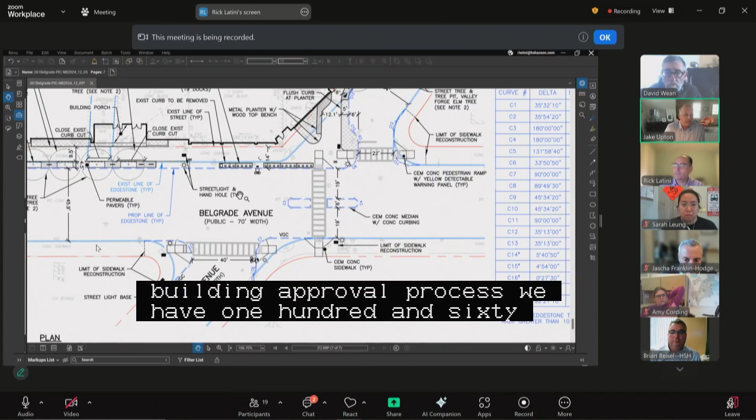Good, thank you. One thing I can add is that as part of the BPDA building approval process, we have a 168-space bicycle parking facility just around the corner from what's on the screen, for the residents themselves. We think that's going to be a robust and very convenient add for the residents. While they'll still have access to the blue bikes, they'll also have robust storage for their own bikes.

Yeah, and I think it's worth pointing out that even people who own bikes and bike regularly often take advantage of the blue bikes. There are lots of situations where I use the blue bike even though I have plenty of bikes at home.

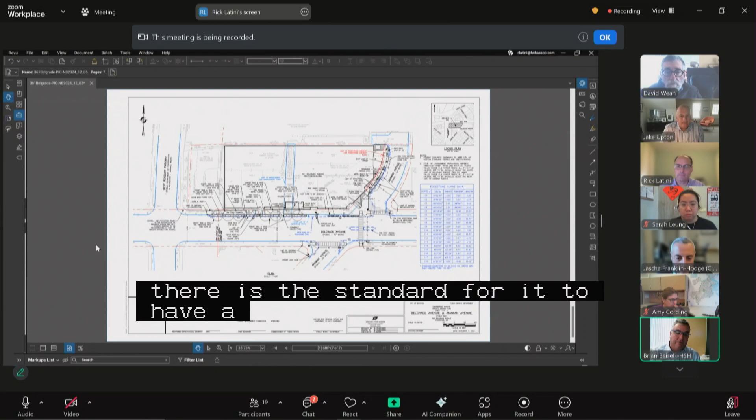Well, thanks, this all looks really good in the respects that I can judge. The 14 feet we were showing is the standard for a station. And not only that, it's 14 feet to the property line—there's actually a foot or two more to the actual building face. So we actually exceed what would be needed, which is great, so we're not creating a pinch point there. I applaud that this is baked into the project rather than thought about afterwards.

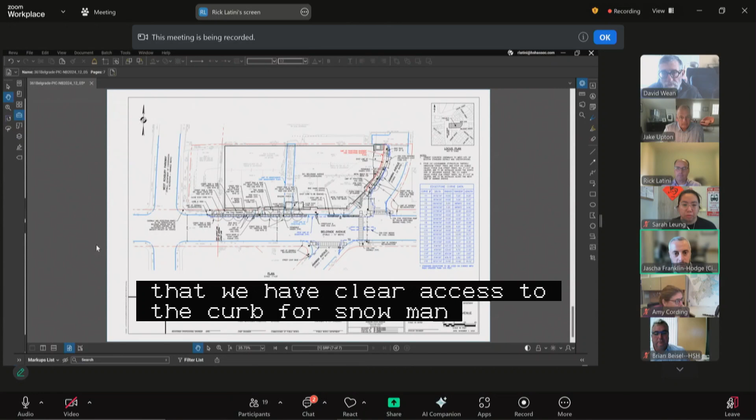Thanks, David. And just to address the winter removal of on-street blue bike stations, from my public works hat: historically those removals have been done to ensure clear access to the curb for snow management. It's not an issue in smaller events, but for major storms where we do snow removal, being able to push snow up against the curb line and then pick it up and truck it away has been important to our operations. Over the last two years we've started piloting leaving more stations on-street over the winter, gradually increasing the number at locations where it's not a concern for winter activities or street narrowing from snowbanks creating safety issues.

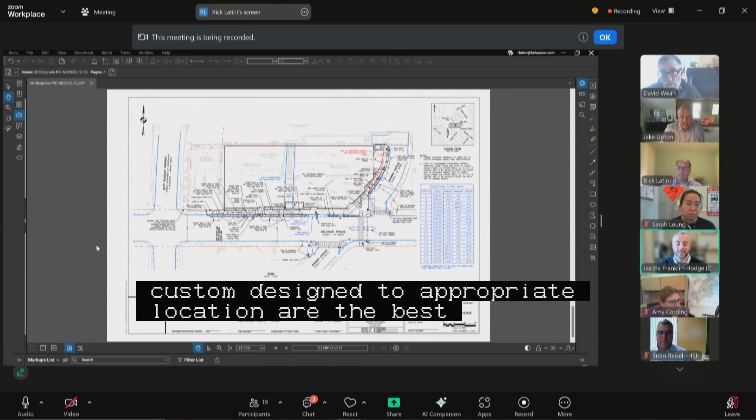So the city is trying to move away from wholesale removal of on-street stations. Ultimately, projects like this that take an existing station and move it to a year-round, custom-designed, appropriate location are the best outcome from both a public works and a cyclist perspective. We're also taking advantage of these kinds of opportunities to build out the permanently constructed environment to support blue bikes. I hear your frustration, and it's something we're working on within the streets cabinet.

That's good—you mentioned you've been piloting leaving some on-street stations in place. Unfortunately the last two winters haven't had that much snow, so it may not be indicative. But thanks very much.

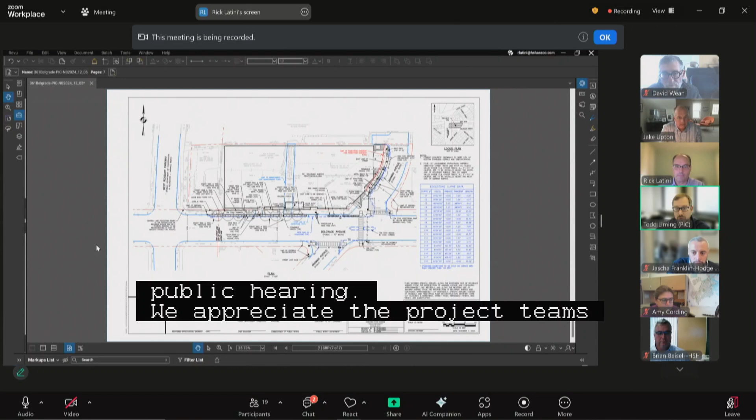Any other public comment or PIC staff? I'll just mention, similar to the last project, this project is still finalizing their title opinion letter, but we expect to have it submitted in the next week, certainly before the public hearing. We appreciate the project team's cooperation—there have been a lot of iterations of this design, and they've been very responsive and diligent in making sure that everybody's needs are met.

Excellent, appreciate that. Having followed the trials and tribulations of this site over the many years, it's great to see it moving ahead for something more productive than its current condition. Appreciate everybody's persistence and working so closely with the city on finalizing the details of the public right-of-way here. So with that, will you be ready for your public hearing in two weeks on December 19th?